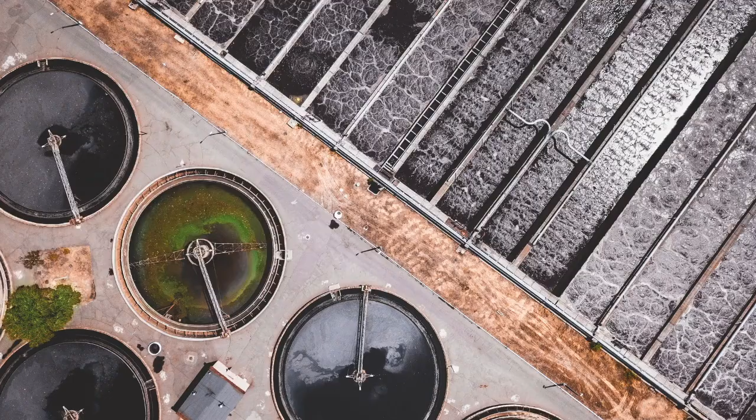So today we have speakers from Stanford University focused on a new way of treating wastewater. We also have with us the general manager of Silicon Valley Clean Water, who is the host facility for some of these projects going on at Stanford. Bob Whitley and I have heard these presentations and became very excited about what they suggest in terms of the possibilities.

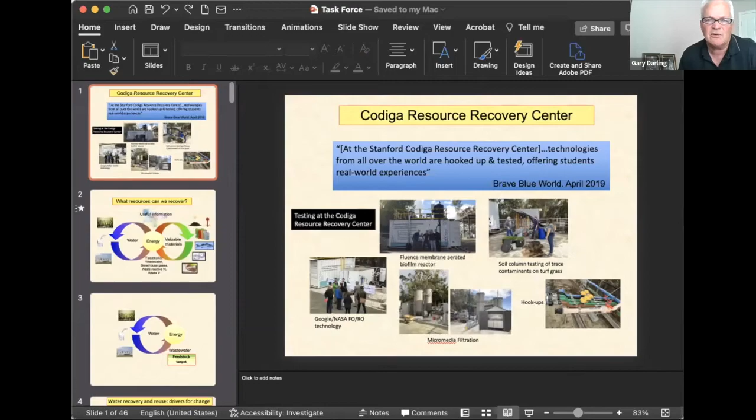Hey, that's Craig. Yes, Craig, this is Gary. So I don't think your slides are advancing, and you're not on slideshow, at least on my computer, so it's kind of hard to see. Oh, there it is. Okay, so this is what I was just talking about, the latent energy that's potentially available within the wastewater. There we go, you can see it now. I'm so sorry, I selected the wrong window to share.

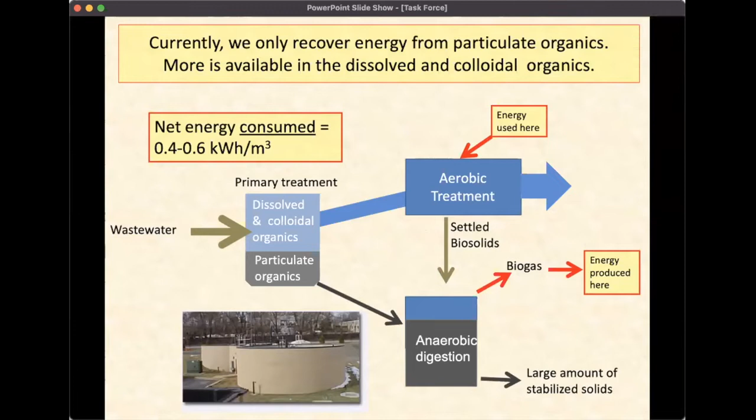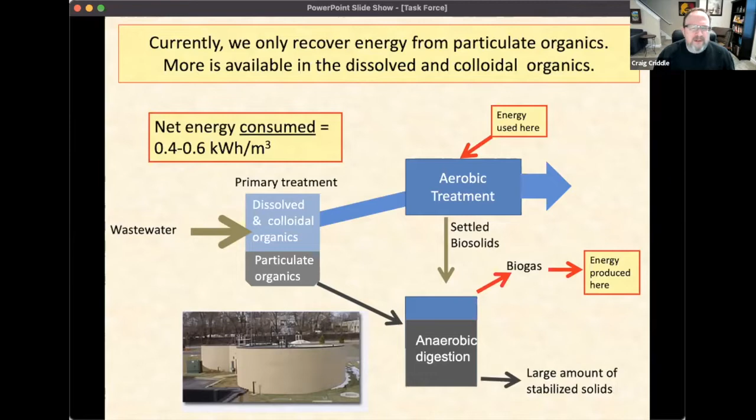No problem. Anyway, currently we basically recover energy only from the particulate organics when we do anaerobic digestion, but there's more energy available. And right now we're using energy for the soluble and colloidal organics, we require energy. So the net result is we have net energy consumption of about 0.4 to 0.6 kilowatt hour per cubic meter. So how can we get the energy from this colloidal and dissolved organic matter rather than spending a lot of energy to get rid of it?

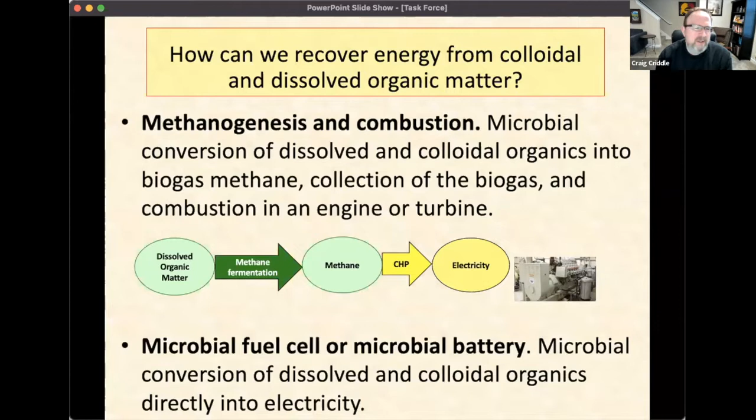One way to think about it is in terms of methanogenesis and combustion of the methane that's produced, and we have good news on that front to talk about. I'll be excited to mention it, and I'm sure Sebastian will follow up well. The other thing we're working on is a microbial battery, and we've got a potential party in India interested in this. We're interested in using these microbial batteries to remove soluble and colloidal material. A microbial battery would go direct to electricity as opposed to going through a methane intermediate.

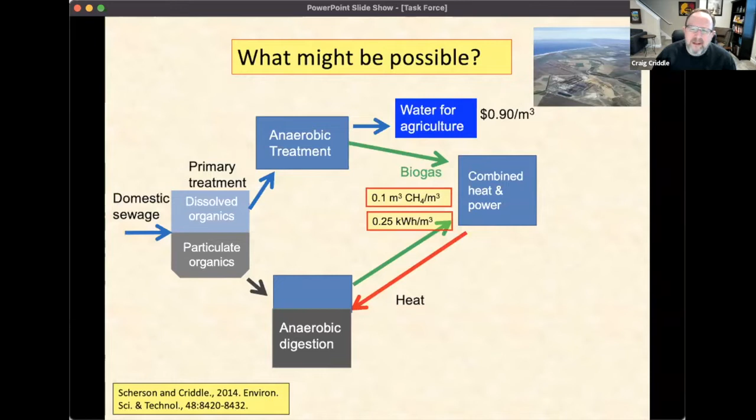Now what might be possible is that we could have a situation where we go anaerobic, and just looking at what could be done, we could get water for agriculture from that. This would be replacing aerobic secondary treatment. It's very exciting, a possibility here that by doing that we could recover almost twice as much biogas from the waste organic matter. That would enable significant energy production, net energy production in theory. But now we have something new to report — it's not just in theory, it looks like it can actually be done.

Now, if we get additional energy from the wastewater, we can potentially use that energy for power, but also for heat. And if it's used to dry the biosolids, we've done calculations showing it could enable even additional energy because of the potential for gasification and use of the syngas for additional energy. So we end up, at the end of the day, with a very teeny amount of ash being produced from the process, so almost nothing for hauling. And we end up with an electricity benefit, and also, yeah, basically those two, the big ones.

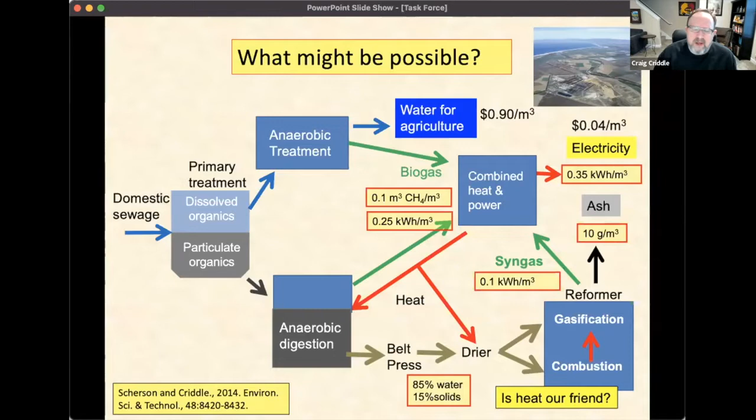So is heat our friend? That's a question we could ask. In this case, we can make use of the heat potentially to dry the biosolids — there are much fewer biosolids if we don't have an aerobic process to deal with.

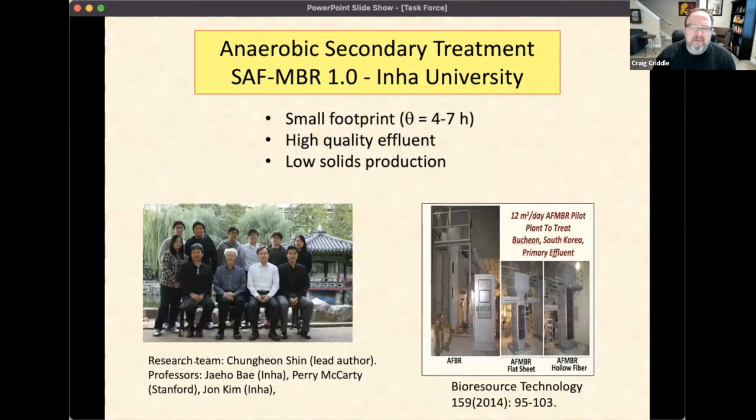Now, what we initially started with was staged anaerobic fluidized bed membrane bioreactor. We call it SAF-MBR 1.0. What made it great was that it was able to meet US regulatory standards in terms of water quality. That was good. But the problem was that there was particle sparging that we were using to clean the membranes, and that caused some damage to those membranes. So that was a problem that we had to address.

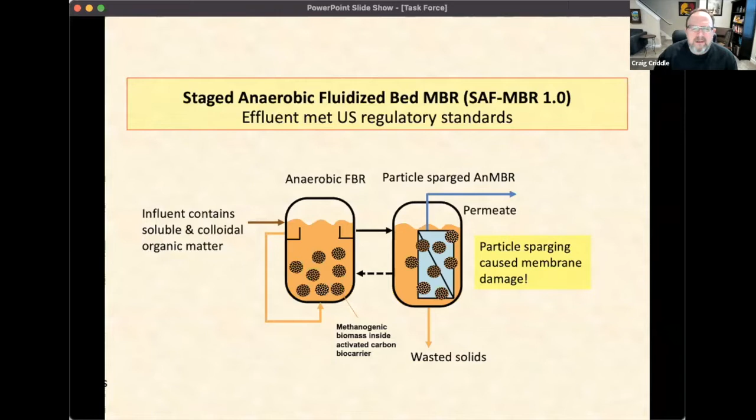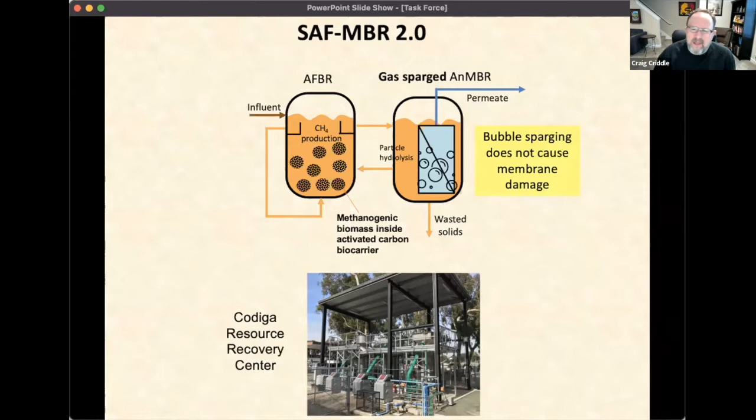So at Codiga Center, we replaced the particle sparging with gas bubble sparging, using biogas to sparge the membranes and clean them. This was an important step forward for us, because now we weren't causing that damage. And the result of this, we've just published in Water Research, and basically now we can boast that we have net energy positive production at the Codiga Center.

So the energy balance, I'll just read this bottom line here. Energy balance on the SAF-MBR 2.0 indicated net energy positive operation, with energy recovery from produced methane exceeding the energy consumption due to the GAC fluidization and gas sparging. So we have net energy production. To our knowledge, this is the first time this has been reported. We thought it was possible, technically possible. Now we have evidence that it actually is possible.

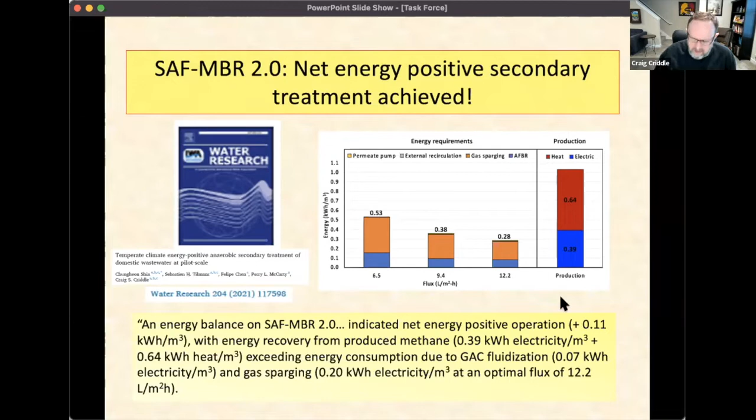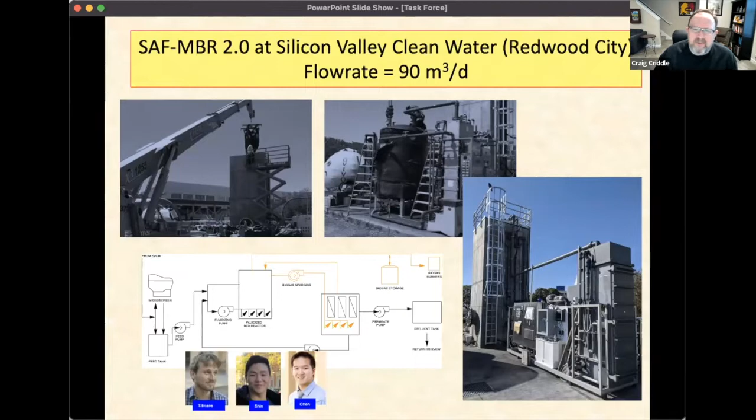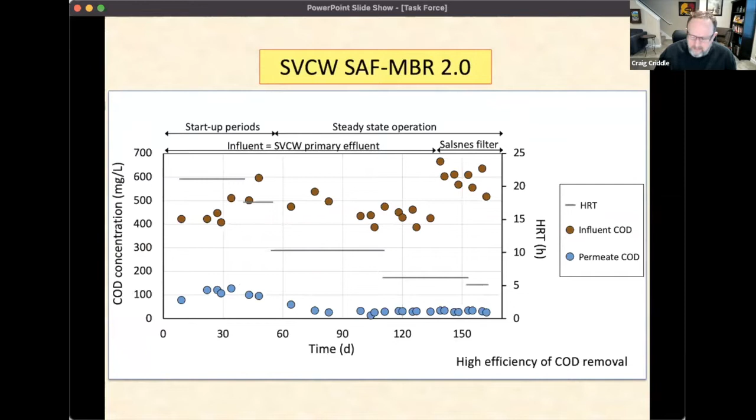And then this graph is illustrating the production side of the equation there. And now we've been working at Silicon Valley Clean Water, and Sebastien will be saying more about this, but this is just showing the stages of construction. This system was different, unlike the one at Codiga, where we used steel to build the fluidized bed reactors and all the system there. Here we're using concrete, and there were many challenges associated with this new design, but basically the efficiency of removal has been very good for COD removal from this system, and I'm going to let Sebastien elaborate further on that rather than go through it now.

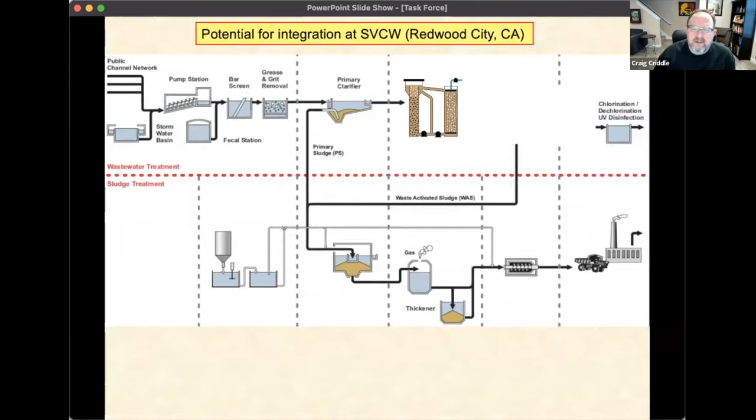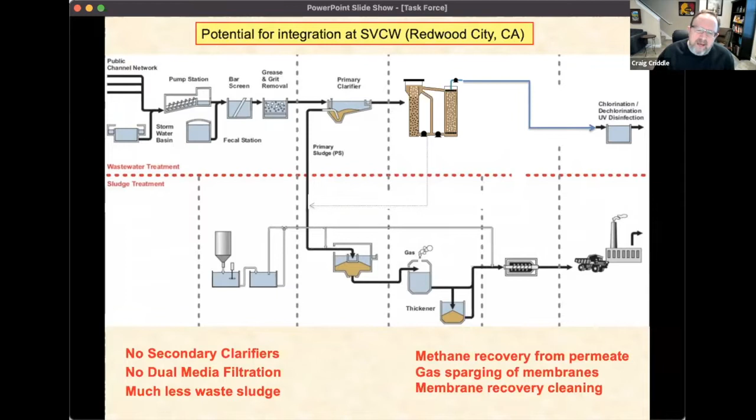And it looks like there are ways in which it might be integrated into the system in the future to think about how we can move this to a larger scale. We eventually would like to be able to replace much of the existing infrastructure that is necessary because of the aerobic systems we've used in the past, and replace it with anaerobic secondary systems. Of course, more testing is needed, but we have positive results from both Codiga and from Redwood City in terms of energy production.

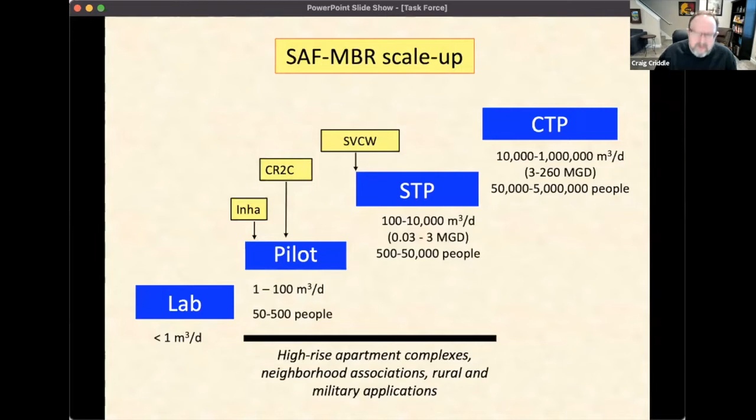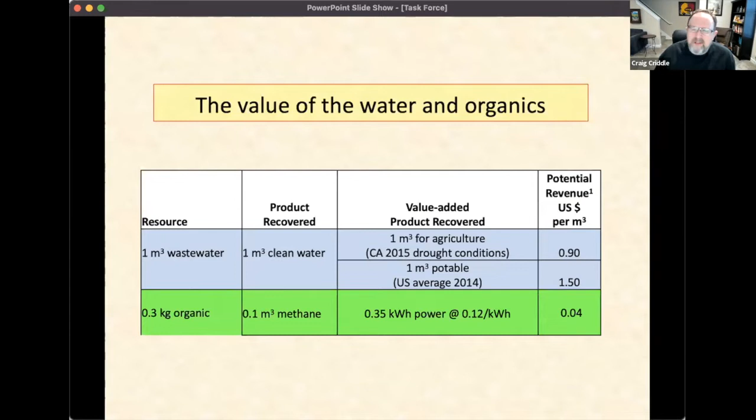This is just showing our way of thinking about how we're moving up the scale for a SAF-MBR. So if we look at the value of water and organics, we can, from a little table here, estimate what kind of energy value we can get in terms of revenue. And of course, water is the big winner, but organics also right there. What else can we do? There's other valuable materials and products that can be made from the wastewater resources.

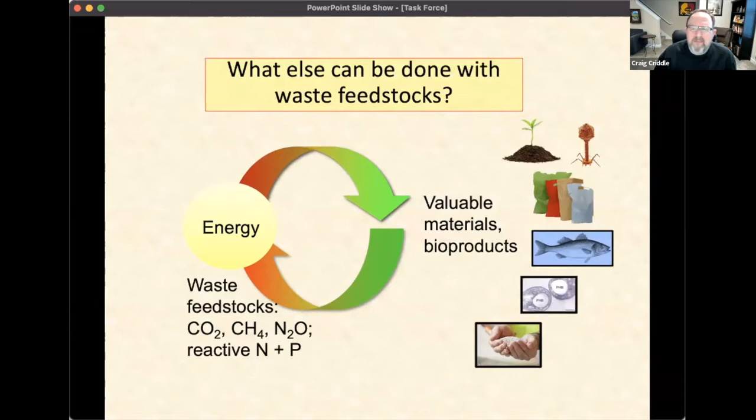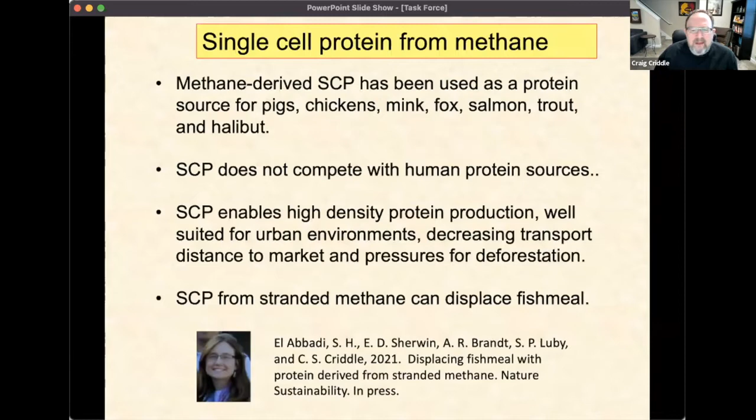One is to think about stranded methane. What could we do with that? And then there's single cell protein. I'm just going to name a few things here. We've just published a paper in Nature Sustainability on the capacity to recover single cell protein from methanotrophs that are generated from taking the biogas and then adding air and getting the conditions right where we can get high density protein production. So we're excited about that. And there's some efforts going on to see if we can get something going in Bangladesh there.

Okay, I'm going to jump ahead. I'm a little worried about giving Sebastian more time here, but one more thing I want to mention that's kind of exciting to me.

We were able to publish an article in Green Chemistry on a fire retardant, a wonderful fire retardant we can get from wastewater. And it's, guess what it is? It's struvite, which normally we think of as something of a nuisance in many cases, and the fertilizer value isn't as good as we would like to see. But it turns out that a colleague, Eric Appel, shown here, and his group in material science at Stanford, they've done testing, and we worked with them, and they did testing of struvite as a component of a fire retardant, and it looked very effective in that capacity.

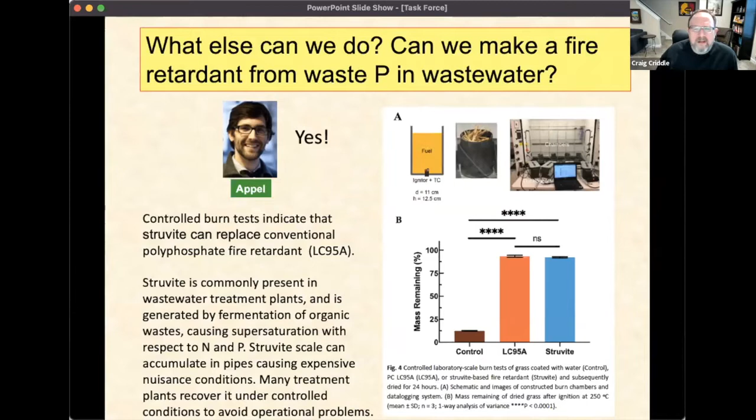The struvite was as effective as the phosphate source that is commonly used in these fire control or fire retardant formulations. So the LC95A shown here on the right is shown to be basically the same as the struvite in terms of its performance as a fire retardant, which means the beautiful thing about this is that we have a higher value product from struvite than we've ever imagined that we had.

And so I'll just read this last thing down here. Struvite-based formulation exhibited performance comparable to the polyphosphate retardant, while requiring 60% less total phosphorus.

Moreover, because struvite is derived from wastewater, applications of struvite in fire retardants can offset demand for mined phosphorus, a finite resource. Analysis of supply and demand for conventional fire retardants in the US indicates that wastewater treatment plants could produce sufficient amounts of struvite-based fire retardants to meet US demands for wildfire suppression, while significantly improving revenues.

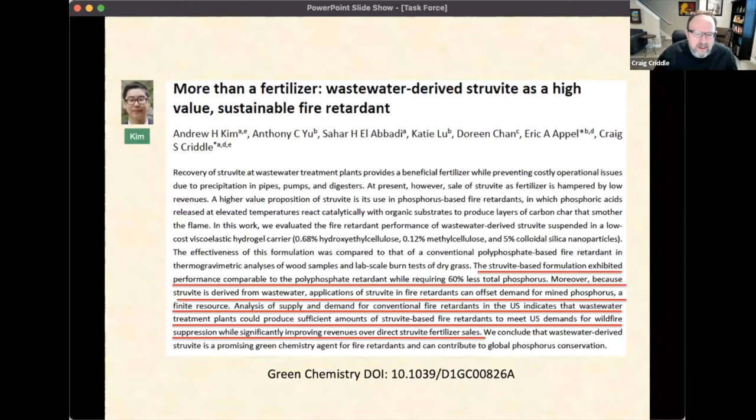Over direct struvite fertilizer sales. So I'm going to end there because I want to give Sebastian the floor, but you can see that this is another exciting outcome that's come up recently, and I'm anxious to get the word out about what's possible with struvite. That's all. I'm going to stop there and make sure Sebastian has time. I don't know if there's time for questions, but I'd be happy to entertain them.

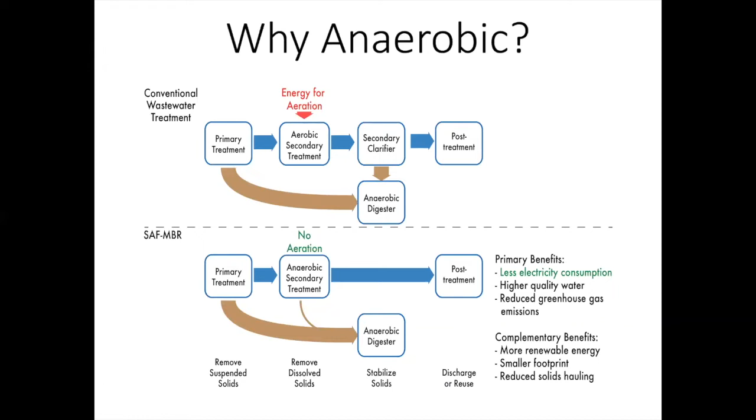Well, please... Sorry? I think that was an error. Go ahead, Sebastien. Okay, so if you look, I've got two kind of simplified process flow schematics here for a wastewater treatment plant. If you look on the top, it's a conventional wastewater treatment system.

You start with primary treatment, where we remove as much of the suspended solids as we can to be able to send those to anaerobic digestion. But a lot of the organic material flows through to our aerobic secondary treatment system, where we have to invest a lot of energy to aerate the wastewater to remove those contaminants. We can get some of that energy back because we can send some of the solids generated in the aerobic treatment back to the anaerobic digester, but we do consume it and end up consuming a lot of energy to facilitate this process.

So an alternative would be an anaerobic treatment process, where we would have a primary treatment system. We would still send as much of the solids as we could to anaerobic digestion. But then, instead of having an aerobic secondary treatment system, we would rely on an anaerobic secondary treatment.

So we eliminate that energy consumption to achieve a couple primary benefits. First, we have less energy consumption, less electricity consumption, hopefully higher quality water, which I'll talk about in a bit, and reduced greenhouse gas emissions from both the electricity and from some emissions that come from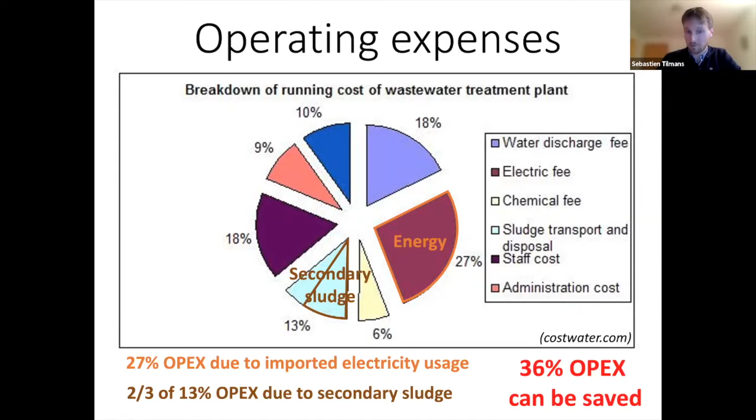So now to talk to you about the system, the process that we've been working on is called the staged anaerobic fluidized-bed membrane bioreactor. And like all good engineers, we've come up with an acronym for that. So we call it the SAF-MBR.

So the bacteria form a film, a biofilm on these individual grains of carbon. And we push water, we recirculate water that flows vertically up through the reactor column, and it suspends or fluidizes those grains of carbon so that they're falling as fast as they're getting pushed up by the water, and they end up kind of sloshing around in the turbulence of the reactor. So that allows us to get really good mixing, really good contact between the wastewater and the bacteria.

But because the bacteria are held on in these grains of carbon that are staying inside the reactor, we're able to hold on to them while we push the water through pretty fast. So that's the first stage, the fluidized bed reactor.

The second stage is a membrane tank. These membranes have been developed by, there's a lot of different companies that furnish them now. The membranes that we've used are called ultrafiltration membranes. They have a porosity of about 0.04 microns. To put that into perspective, typical bacteria are about half a micron, so the porosity is about one-tenth the size of typical bacteria.

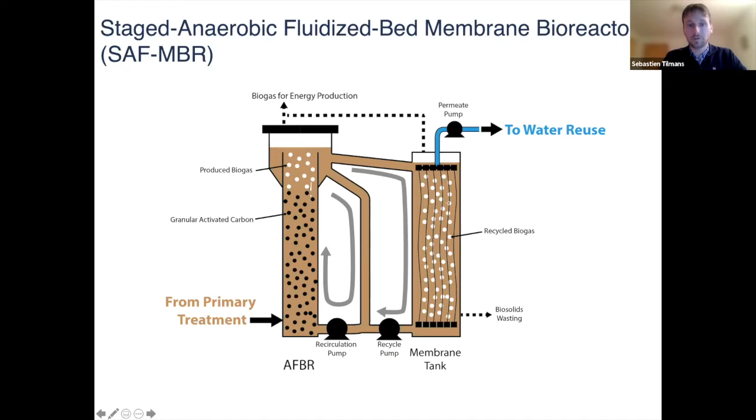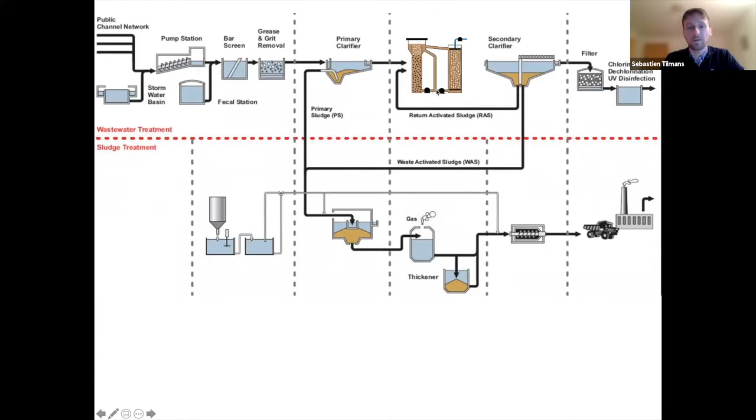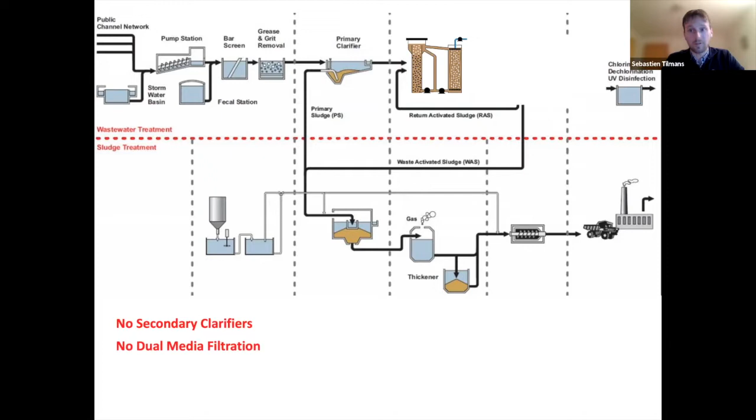In the case of the SAF-MBR, you could replace the aeration basin with the SAF-MBR system. And that would eliminate the need for the secondary clarifier. It would also eliminate the need for the filters, the sand filters, the dual media filtration that comes after. So you could eliminate, of course, recycling of the activated sludge. Your effluent from this system could go nominally directly to your disinfection process. We'll talk about, I'll introduce some caveats later.

You would have a lot less waste activated sludge that would be sent to your digestion system. So this is kind of the big advantage of this system.

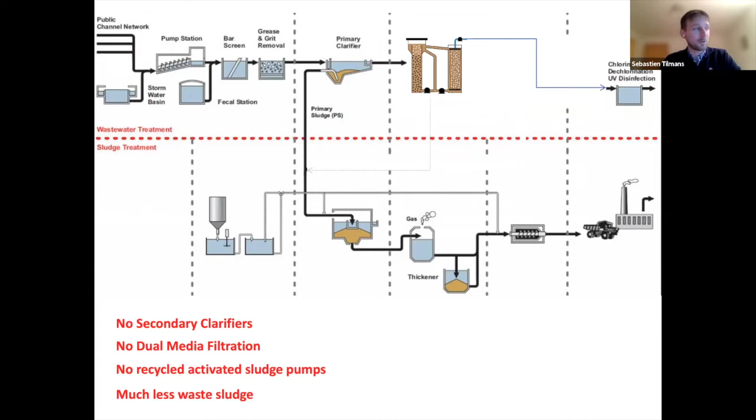There is no free lunch. So there are some elements that we still need to operate and manage, including some water pumps and the gas sparging blower that I talked about. And the new complexity in operating this kind of system is to manage the membranes properly.

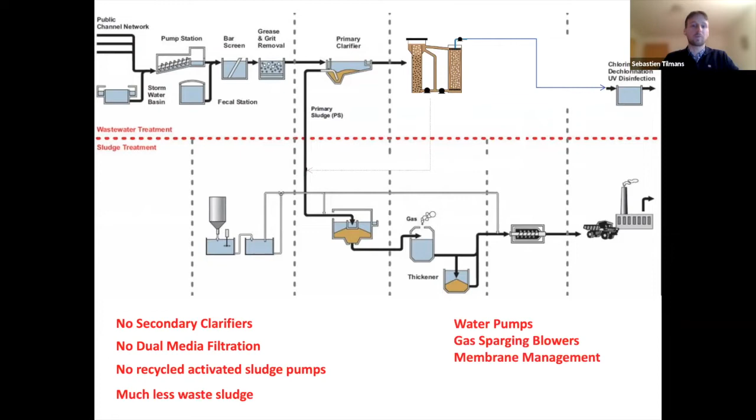From that, we can move the water through a microscreen, which is an alternative process to a conventional primary clarifier that works in a much smaller footprint. So we have that option at our demonstration facility to push the water through the microscreen, but we can also bypass it and go directly to a feed tank from which we feed the water into the recirculation loop, the fluidizing loop of the fluidized bed reactor.

Water from there flows into the membrane tank, and it's pulled out of the membrane tank by a permeate pump. It's sucked through the membranes by a pump that sends it to our effluent tank.

We have a biogas sparging blower that blows biogas from the headspace of the bioreactor into the base of the membranes, and then that biogas can flow back to the headspace to equalize. And then we have our recycle pump that pumps the retained solids from the membrane tank back into the biological tank. The excess biogas is stored in a biogas storage tank to equalize it.

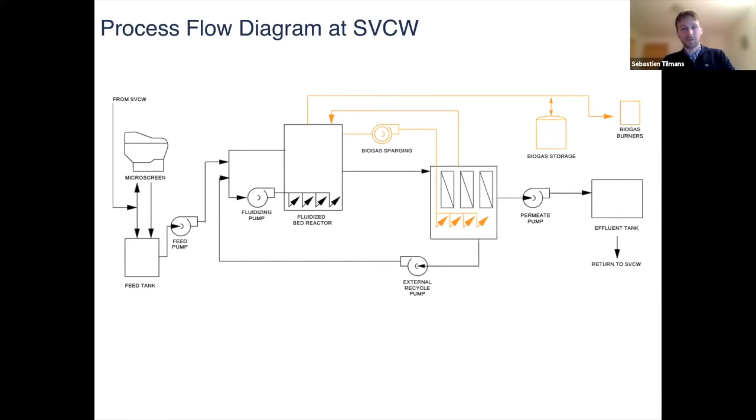But we built it out of concrete because if we were to build a 12 million gallon a day plant, which is what SVCW is on average on a dry weather day, you'd be building it out of concrete. That would make the most sense. It would be the most economical, and a rectangular form factor like that is what would make sense.

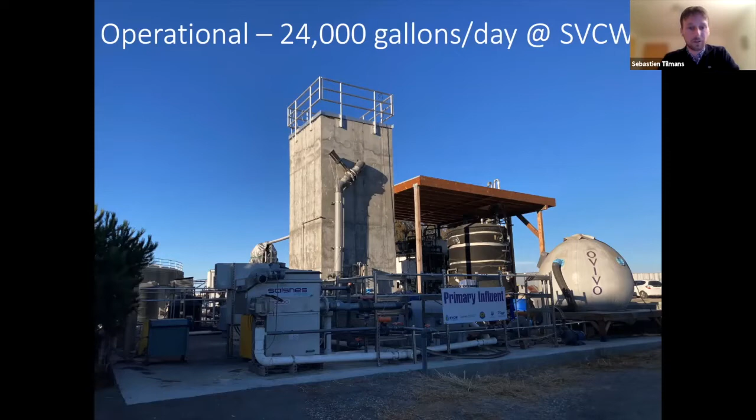Looking at the same system from the other side, this PVC tank is our membrane tank. In there, we've got 9 membrane modules. This stainless steel panel is our control panel, and we've got a couple of pumps and blowers, etc., on the skid.

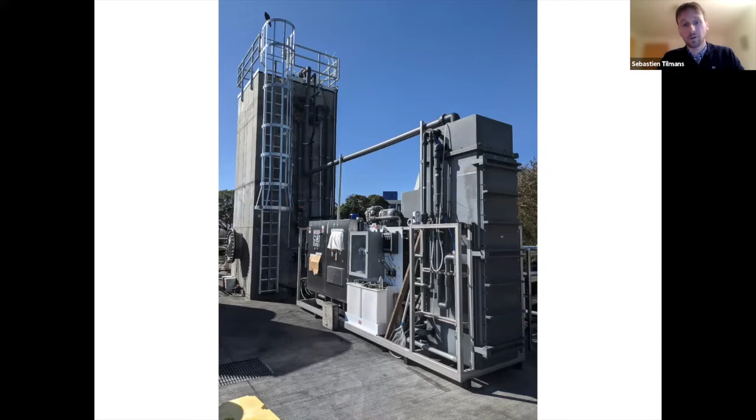So this system has been operating now for, it's actually been operating for longer than the slide I'm going to show you, but the data that I'm sharing for you right here is from the first 240 days of operation, and shows the startup of the system.

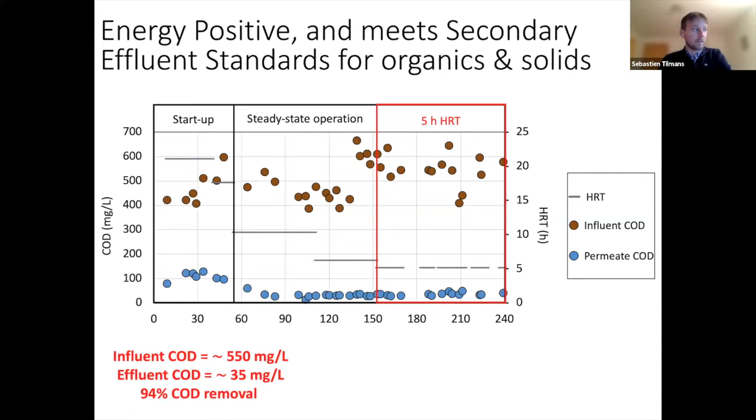And that's about a 94% removal. So these are, we think, really, really good performance numbers. To put it also in terms of BOD, which is a metric that's more typically on permits, we had an effluent BOD of about 15 milligrams per liter typically, which would also be typically in compliance with permit standards.

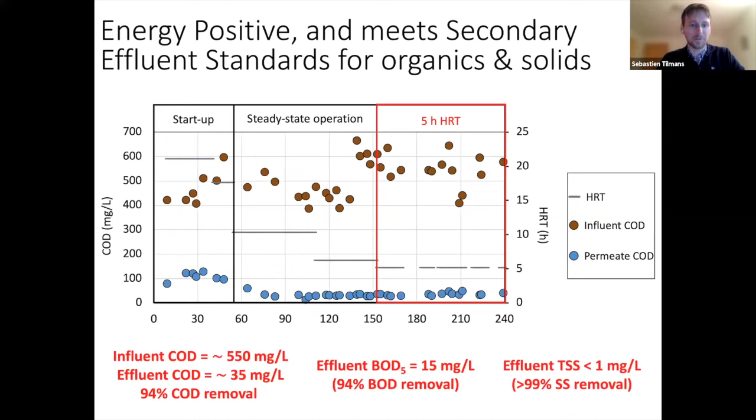All the while at 5 hours of hydraulic retention time. Our effluent suspended solids were 1 milligram per liter, which is what you would expect because that's a membrane bioreactor. If we had anything higher than that, we'd be worried. But we achieved all that at about a 5 hour hydraulic retention time, which is lower than you can typically do with an aerobic secondary treatment process.

A conventional aerobic process would take about 7 to 10 hours of hydraulic retention time when you factor in both the aeration basin and the secondary clarifier. So hydraulic retention time directly translates into footprint. The big punchline here is that this system shows we could achieve really high effluent quality anaerobically in a smaller footprint than you could in a typical aerobic process.

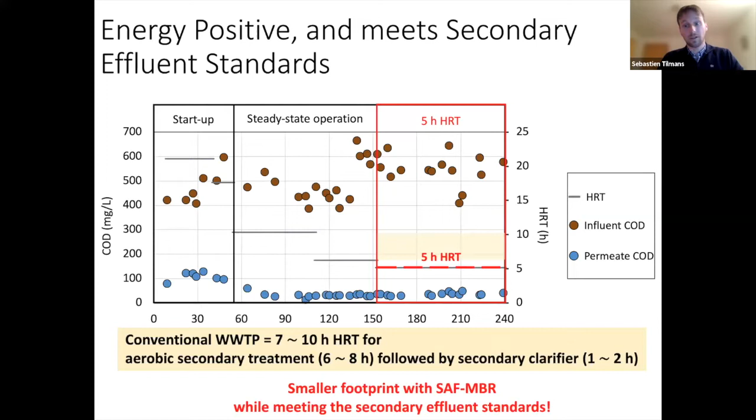Now, the other really exciting piece of this is biosolids production. And here I have to apologize, my units here are metric units, and I operate the Codiga Center, so my brain is constantly switching back and forth between the metric units of academic journals and the US units that are used in operations. These graphs are in metric, but luckily here we're talking about biosolids production, so grams of volatile suspended solids per gram of BOD/COD that's removed - you could just swap in pounds and it'll be the same.

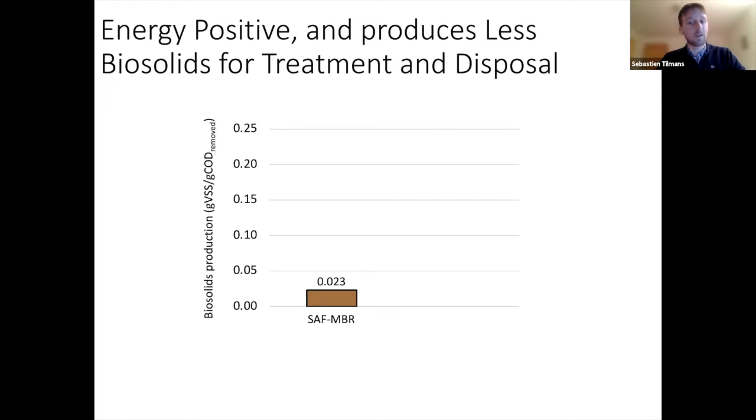The system produced about 0.023 grams of suspended solids, VSS, per gram of COD that was removed. When you compare that to a conventional activated sludge process, we're talking about close to a 90% reduction in the secondary solids that are produced. So you still have to process all your primary solids, so it's not a 90% reduction in the total solids that are produced, but still, when you're just looking at your biological process, this is a major reduction in your solids production, and therefore in the amount of solids that you'd have to haul offsite.

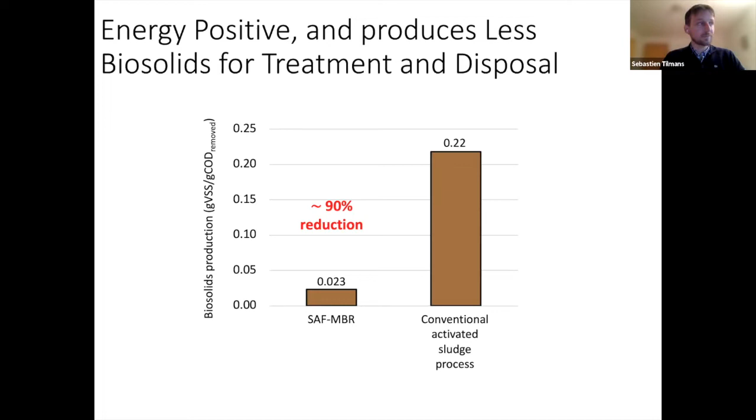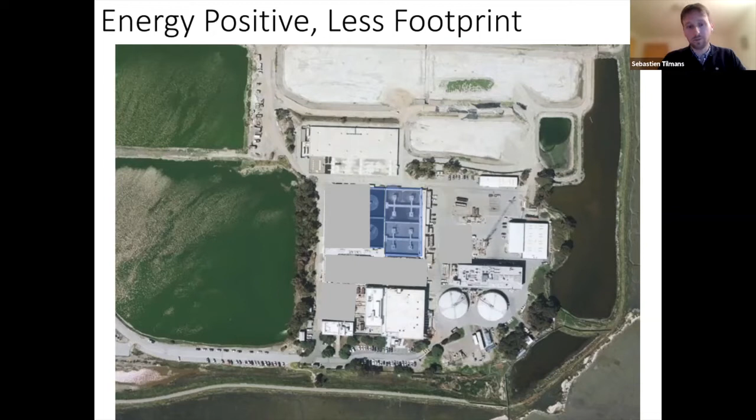But the visual still holds here - you could take out a third of your digester capacity. And that doesn't necessarily mean you'd want to get rid of all this tankage, but this is now tankage that in an arid California environment, you could maybe think about repurposing for things like water reuse, for example, which is a growing need in our area.

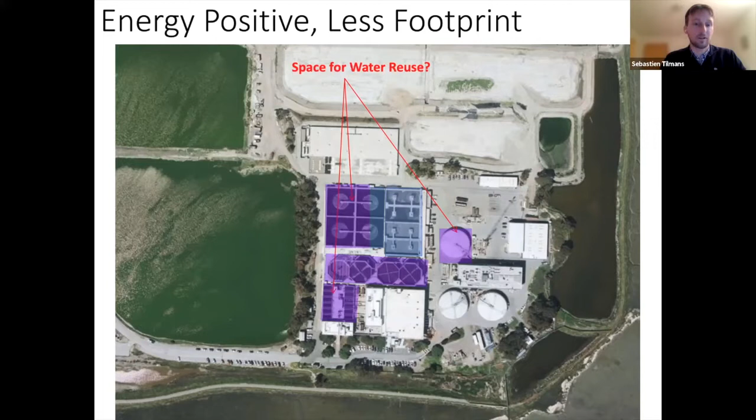Putting some numbers on the energy balance, the energy requirement - these numbers are in kilowatt hours per cubic meter. The total energy requirement for this system at SVCW, sorry, I misspoke, is about a quarter kilowatt-hour per cubic meter.

Now, the energy content of the biogas produced in this system, when you add up what's dissolved in the effluent and what's coming out in gaseous form, from what we measured with our instruments, the electrical energy potential of that total biogas is larger than what we need to operate the system. So you'd have a surplus of about a little over 1/10 of a kilowatt-hour per cubic meter, meaning your secondary treatment process would be a net energy producer instead of the big energy consumer it typically is today.

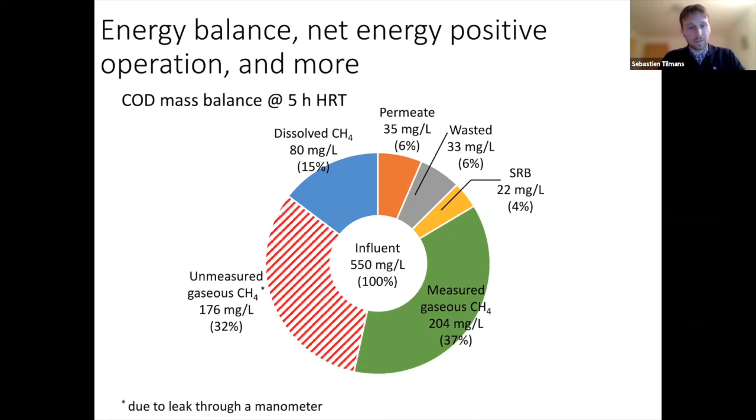So this is what we got based on just our measurements on site. When we did a mass balance of our COD, we measured the total COD coming into the system, about 550 milligrams per liter. What does that equate to when looking at where the COD is going and what we can account for? We found that we were missing a big chunk, about a third of the COD coming into the system that we couldn't account for based on what we measured. That means there's a substantial amount of gaseous COD that we're not measuring in our system, or weren't measuring at the time.

That could be a few different factors. It could be instrumentation error, or it could be some fugitive emissions, some leaks from our reactor. And of course, that points directly to the challenges, one of the key caveats of greenhouse gas emissions benefits of this kind of system. If we've got fugitive methane emissions, that's not a good thing. So this is something we've certainly been sleuthing on site to address.

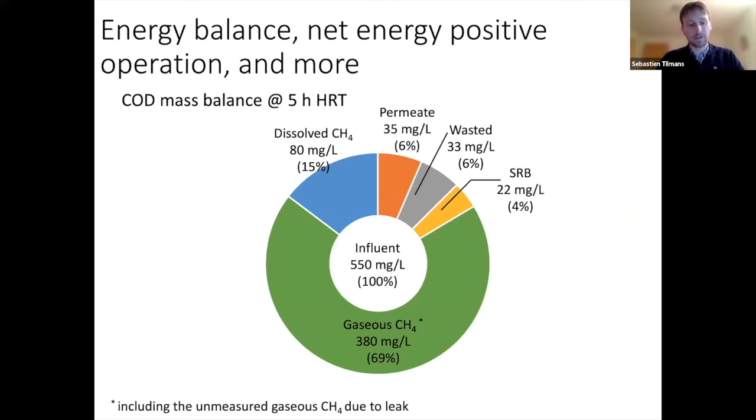But the bigger punchline is when you factor in that, in a system fabricated at full scale with careful attention to making sure the instruments are capable of measuring gas flows accurately and that there are no gas leaks, our energy balance actually looks much more favorable.

So here I took a quick moment to translate the numbers into units per million gallons. If we take what our mass balance indicates is the full biogas production of the system, we'd actually be able to produce a surplus of about a little over 1,300 kilowatt hours per million gallons of wastewater processed. That's a lot of energy, and that's just the electric energy. There would also be about almost 2,500 kilowatt hours per million gallons of heat energy available for processes like potentially sludge drying or other process heat needs you might have at a treatment plant.

We know of no other technology in the world that has demonstrated this kind of energy potential on secondary treatment alone. So basically this means you could have a wastewater treatment plant be a renewable energy power plant without having to import high strength organics from other places. We have examples like East Bay Mud right now that imports high strength organic waste and is able to export renewable power to the grid, but they're not able to do that just based on their wastewater alone.

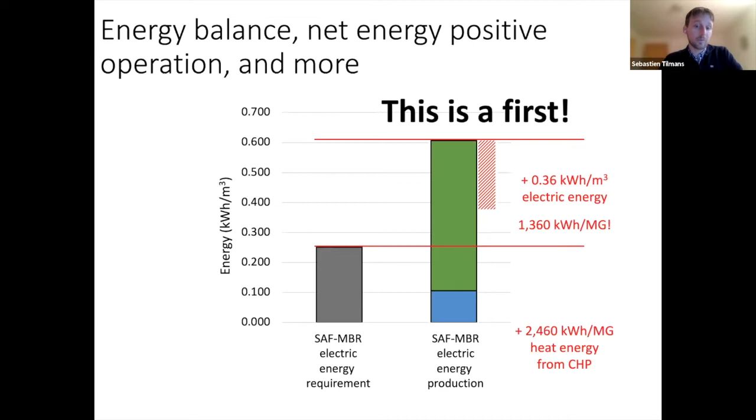We think we can actually further optimize the energy consumption of the system. Highlighted here in yellow is the consumption of energy for fluidizing the granular activated carbon.

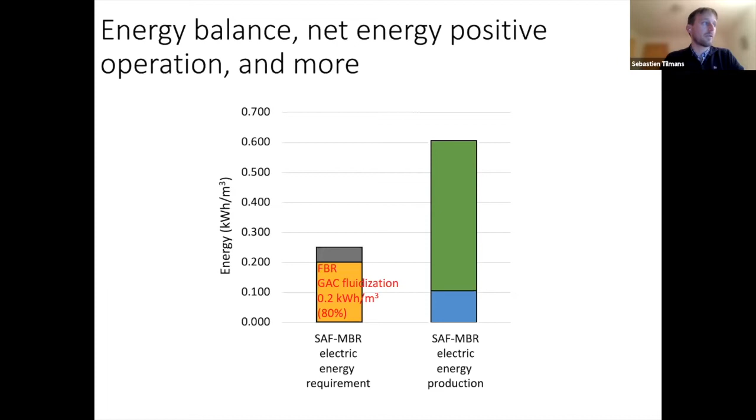Not to dive too much into this graph, but basically we designed the distribution manifold of this system at SVCW conservatively, because you want to make sure it works as you're demonstrating at larger and larger scale. You have to induce a certain amount of head loss in the distribution manifold of the fluidized-bed reactor to ensure even distribution of flow inside the reactor. You need about 30% of the head loss that's in the GAC, the granular activated carbon bed, to be induced in the distribution manifold. We overshot this quite a bit, which means that 57% of energy loss you see in the distribution manifold, plus the 18% in the check valve, could be optimized hydraulically to make the system even more energy efficient. So we think there's even more of an energy benefit to be achieved in this system.

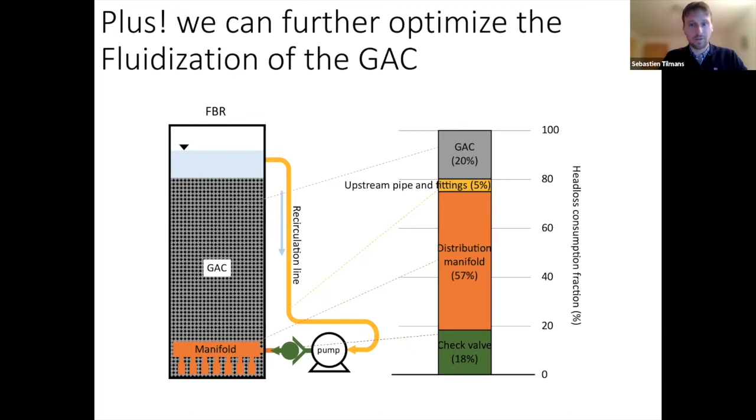So now, summing up what we've demonstrated or achieved here at the SVCW demonstration, this, as far as we know, is really the first energy positive secondary treatment system that we know of, building on the success we had at the Codiga Center and enhancing it.

That energy positive secondary treatment system would allow a fully energy positive wastewater treatment plant. Meanwhile, you'd reduce secondary solids production by about 90%, yielding even more energy savings when you consider trucks taken off the road. You could save a little more than a third of your operational costs, and you'd have a lower carbon footprint from reduced emissions in both energy generation and aerobic processes. One key emission from aerobic processes is nitrous oxide produced in the aeration basin, so that would be eliminated. You do still have methane, so the greenhouse gas benefits depend on carefully managing methane and ensuring there are no fugitive emissions.

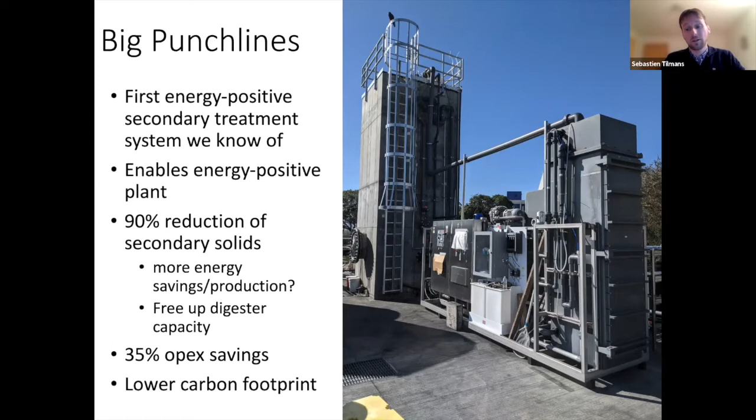I'd be remiss if I didn't highlight our appreciation for SVCW here. This is the East Bay Leadership Council, and we talk about leadership—SVCW has really gone above and beyond in showing what leadership from a utility can be. Research involves risk. When you write a proposal, you're proposing to do something you don't exactly know how to do, and a wastewater utility has an obligation to be stewards of ratepayer funds and resources. It takes a great deal of boldness for a utility to take on this kind of project. SVCW did so by pursuing this grant with the California Energy Commission and follow-on grants, persevering through many challenges, and doing it all in the midst of a pandemic alongside a massive capital improvement program. I can't express enough our appreciation for SVCW, both for their leadership and for the countless staff members who have helped us day in and day out keep things running.

But now to talk about some unfinished business about anaerobic secondary treatment—what are the questions we still need to address before this is ready to take over the world?

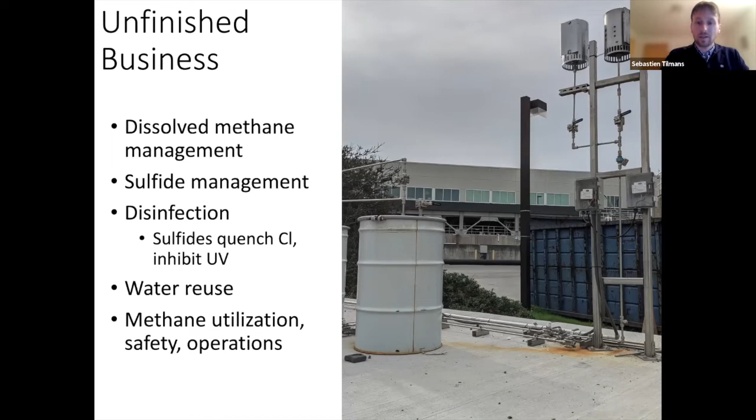Now talking about future work to address some of those challenges, SVCW has secured grants from the U.S. Bureau of Reclamation and the California Water Resources Control Board to test pilot scale technologies for non-potable and potable reuse. One of the things we'll be doing is investigating the most low-cost ways to manage sulfide in the SAF-MBR effluent, and putting together process trains to achieve the equivalent of full advanced treatment for potable water reuse.

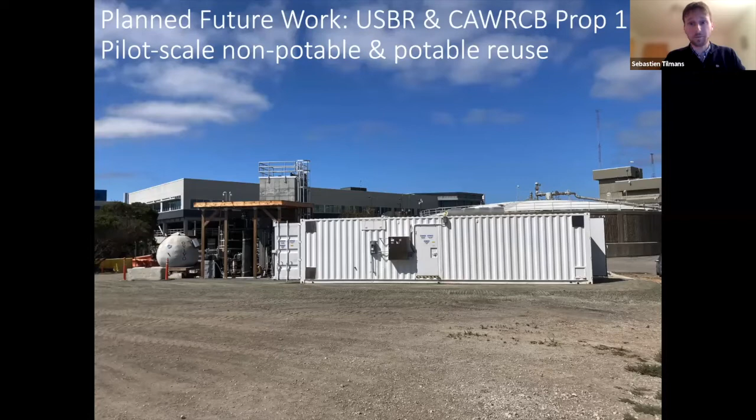So we'll be including reverse osmosis, advanced oxidation, and disinfection. The shipping container you see there that's been recently installed is a technology for nutrient removal that can also double as sulfide management—a membrane aerated biofilm reactor that we're going to bring online later this month. So there's a lot still going on at SVCW.

Thinking a little about paths forward, what would be the next step, the next scale? I think we've demonstrated this system at 24,000 gallons a day—that's a far cry from 12 million or 50 million gallons a day. So there's going to need to be an intermediate scale-up to fully suss out the technology before it's ready for prime time—something between hundreds of thousands of gallons a day to maybe 1 million gallons.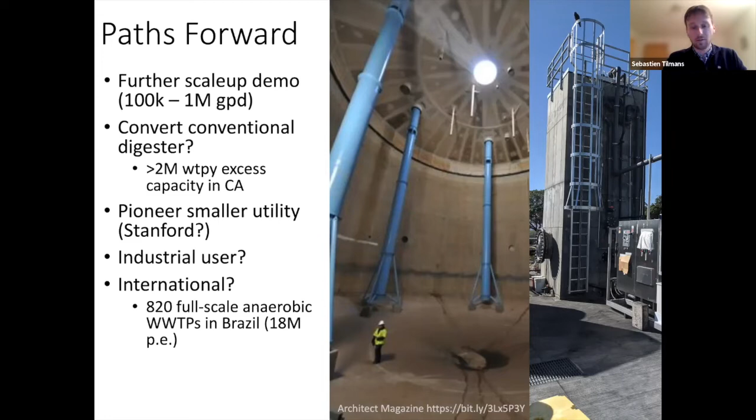So those were some thoughts on the future, and I'll close off with a thank you, first and foremost, to the SVCW team. I named some by name, but there's also the operations staff, laboratory, maintenance, and warehouse staff who've been so critical to this project.

On the Stanford team, I'll highlight Chungheon Shin, who Craig already mentioned, who produced basically all the graphs I shared today and has been an amazing researcher who really spearheaded our efforts here. So with that, I'd like to thank you for your time and leave the floor for Teresa, and hopefully answer some questions afterward.

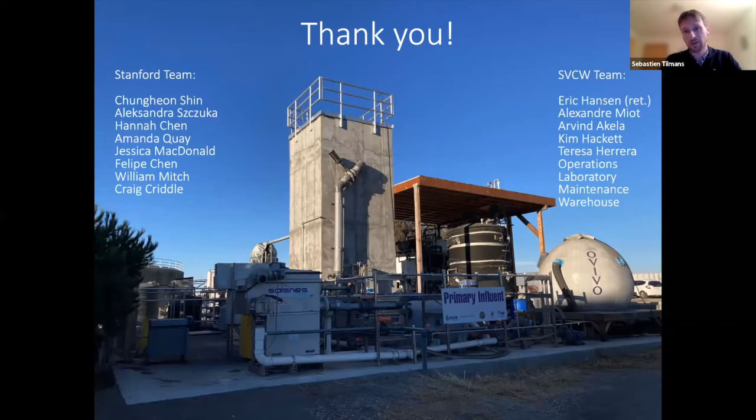So thanks, Sebastien, for showing our overview of our treatment plant, because that's probably what I would have shown.

So listening to the radio this morning coming in, I heard that it's Random Acts of Kindness Week, and the 17th is Random Acts of Kindness Day. So I'm going to say a lot of kind words about Sebastien and Craig, not just because it's this week, but I give a lot of credit to them. They hit up against some walls named Teresa as they were developing this here at SVCW, but persevered, and I'm glad they did, and I'm glad they kept emphasizing the value of what they're doing, because I see it.

That said, I was skeptical at first, and as we all know here, wastewater professionals tend to be a conservative group of people. We're comprised of engineers, operators, mechanics. We like a lot of safety factors built in. We take our mission as protecting public health, protecting our ratepayers, et cetera. So we tend to be risk averse.